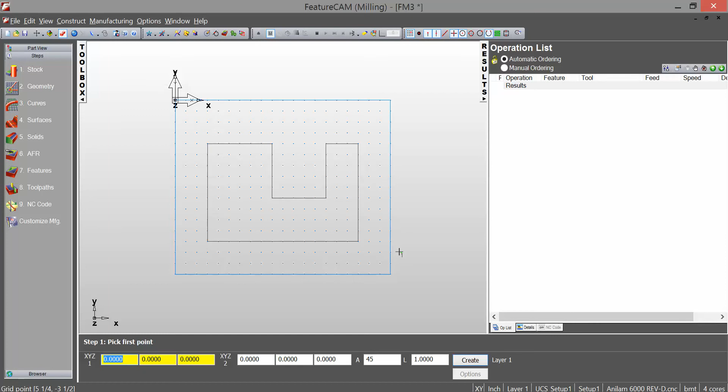So make sure all your geometry is placed properly using that Cartesian coordinate system. Before you can start creating features, you have to put down your geometry. Let's say we're creating a pocket, and I want to create this shape as a pocket. Right now there are 8 different pieces of geometry out there. They are individual pieces, they act on their own. FeatureCAM cannot recognize that as a boundary. You're going to have to create what's called a curve so that FeatureCAM can see that as one continuous piece of geometry as a boundary for your tool.

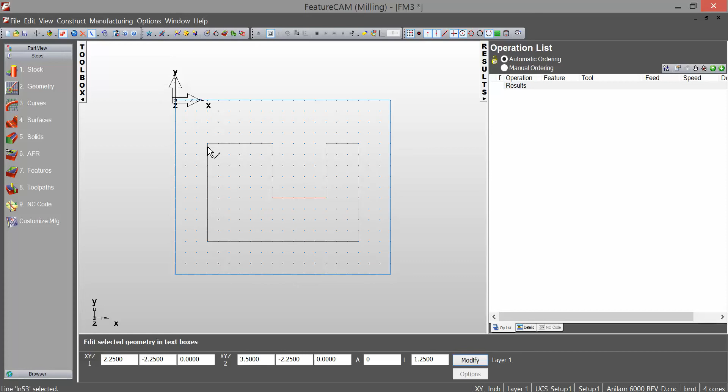So once you've drawn whatever shape you want, let's use the tools and draw this at a specific size. Let's draw that same U shape, 1 inch away from each edge, with a 1 by 1 cut in on it. To draw that, I'm going to use my horizontal and vertical lines. My horizontal line, I'll put 1 inch away from the top, which would be -1, and 1 inch away from the bottom. This is 4 inches tall, so that's going to be -3.

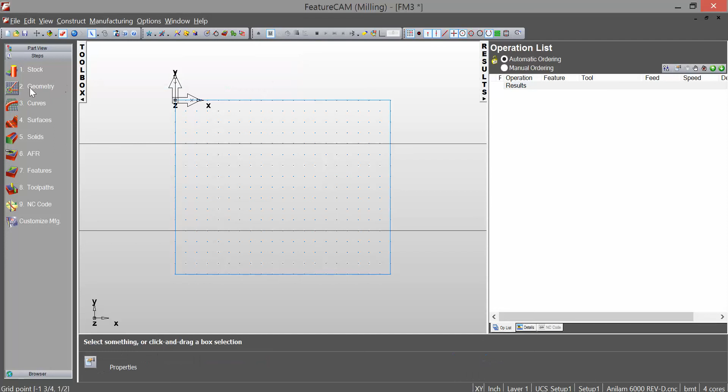I'm going to use an offset of 1, offsetting this top line down 1 inch, and that's going to be the line for the bottom of that little inset. Then I'll use line vertical. This is an X measurement, so my first one is X1. And then this is 5 inches wide, so my next one is going to be X4.

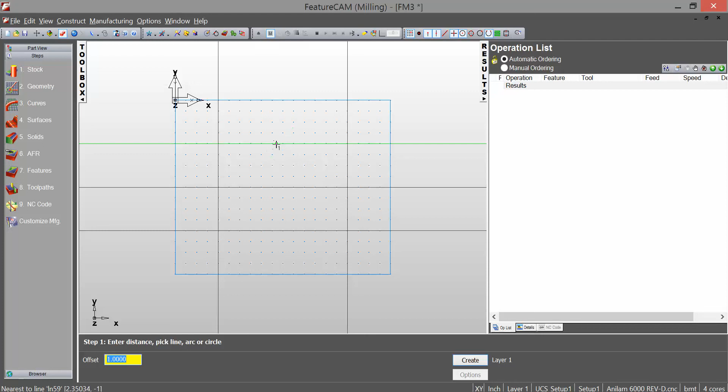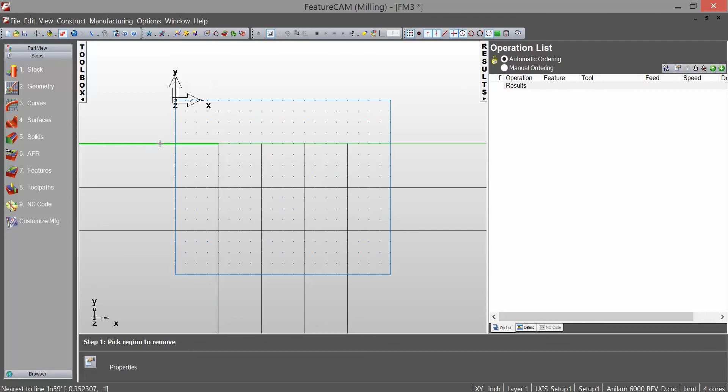Go back into geometry, use my offset of 1 inch. I need to make sure I have 3 inches in between these lines, and I want to make a 1 inch inset, so that makes it pretty easy. I just need to offset each of these lines to the inside to create that boundary. Now, right now it may look like there's just a bunch of squares on your screen. You just need to go back in geometry, edit clip, and go through and remove the pieces of geometry that you no longer need.

There are multiple ways to come up with the same result in this. Find whichever one is easier for you and use that. You may like using those connected lines - the only thing is you want to make sure the points you pick are the right points. If you're using snapping modes and your grid is set up correctly, you're good to go. I tend to favor the horizontal and vertical lines because there are fewer coordinates to put in, and I can use offset pretty easily, then just come in and clean it up with clip.

So there is my U that is going to become my pocket. Again, there are many individual pieces of geometry in here - we have to stitch them all together to create one boundary. That's what's called a curve. Underneath geometry on our left side, you'll see curves. Clicking that gives you the curve creation dialog box. This first option chains a piece of geometry into a closed boundary, the second chains it into an open boundary, and then you have curve wizard and curves from surfaces.

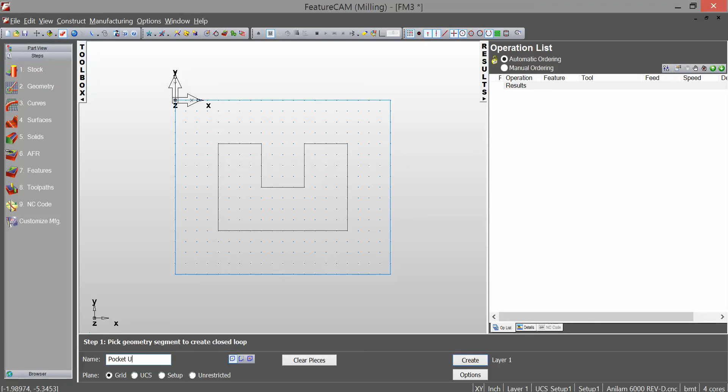Because this is a closed boundary, we are going to choose closed curve. Down here at the bottom, you can name your curve - I'm just going to name this pocket U to let me know what it is. I'm going to click a point on that geometry, and it will follow all that geometry until it gets back to the original point and creates a curve. You can hit create, and then you have that curve created. Now, let me back up and get rid of that curve.

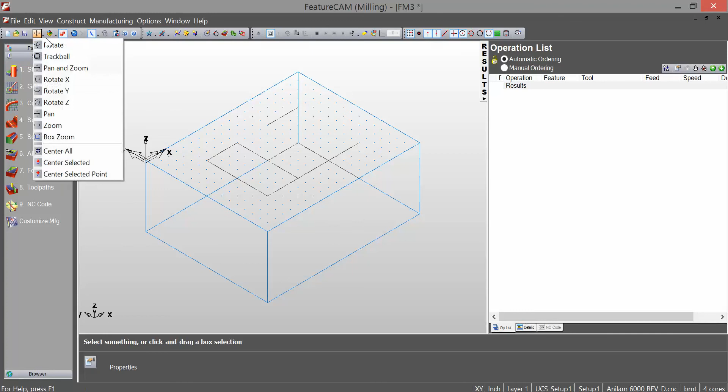Remember what I was saying about Z0. If you had a line here and the Z was not 0, if Z is negative 0.5, I hit modify... let's say I hit that, it's a -1. On screen it looks okay, but if I were to change my view, you can see that line, or those multiple lines, are not on the same plane. But when I'm looking at my top view, it looks fine.

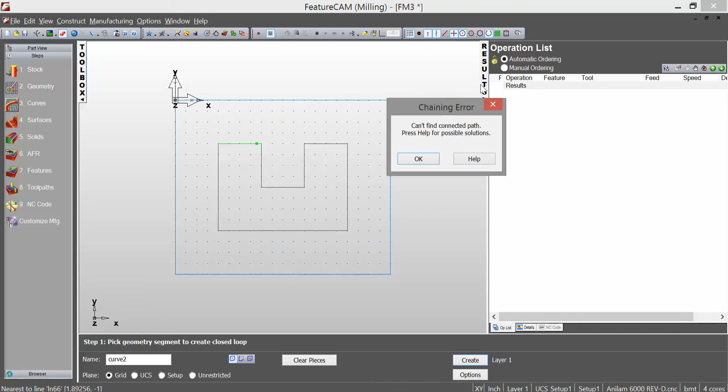And if I go to my curves and try to curve that, I'm going to get an error. So if you see this error and you're looking at the screen, you wonder why doesn't that look right? Everything's connected, but it's not curving. Check your Z's. I have some wrong Z measurements here.

The reason why you can see both of those updated is because this second one is an offset. So when I change this one back to 0, it'll change the other one as well, because this line is based off of this line. That's because I used offset.

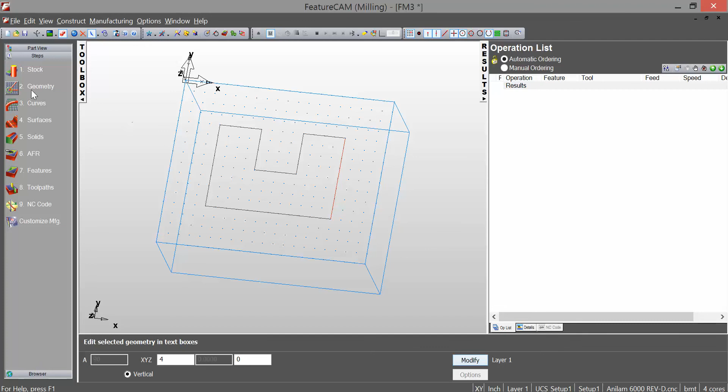So I can go back into curves and create that curve. Name it, create, and there I have a boundary to use for either my pocket or boss or whatever I'm doing. That's a closed curve.

If you're doing a side, or a turning operation, you may have multiple lines, but they are not a closed piece of geometry. But you still need to curve it because they're still individual pieces of geometry.

To curve this one, you want to choose the chain pieces of geometry into an open boundary. You click that first piece of geometry, then click the last piece of geometry in that curve, and it's going to follow all the lines until it gets to that second point, and put all that into the curve.

You can also, if you ever need to edit these curves, come into your part view. You can see all the curves that you've created so far. Here's the pocket, here's that side. You can edit these curves.

I can clear all the pieces and try it again. Down here is close curve. Create a new curve. Or if I want to take away or add to this other curve, I can hit edit.

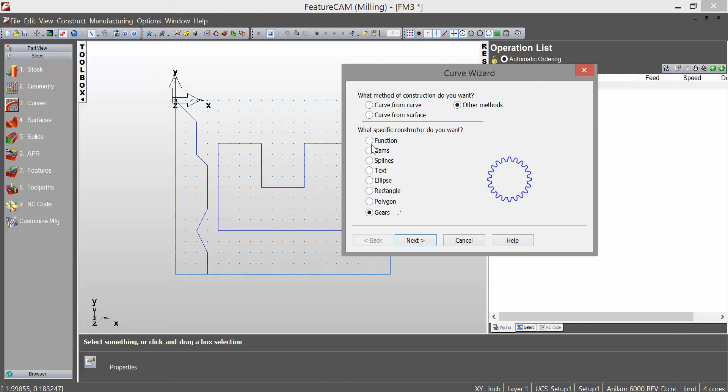The nicest one, the coolest one here is the text. You can go through and create text based on different types of fonts. And it'll put text as a curve on your piece. So if you wanted to do some engraving, or create a water jet profile to cut out a name or something, you can create text based on those curves.

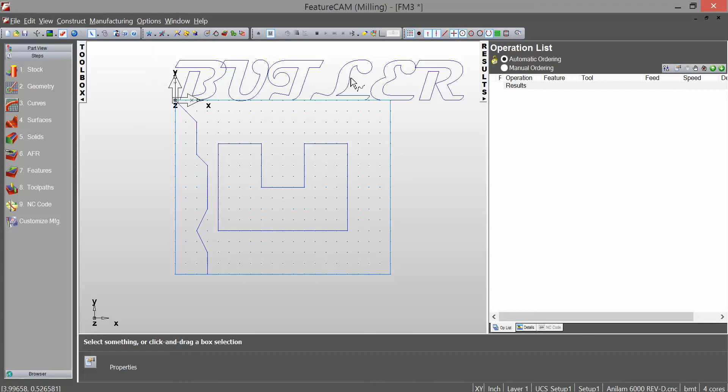So again, just to reiterate, you will draw your geometry using the geometry tools. Make sure they're all on the same plane. Once you have your geometry drawn, if it's a closed curve, pick curves, pick this first one, chain pieces of geometry into a closed boundary. Click that, click a point on that closed geometry. It'll create a curve based on that.

If it throws you an error, check your Z on some of your geometry. You may have a Z measurement off.

If you're creating a side or doing some turning operations, you draw your profile, and then you would do a chain pieces of geometry into an open boundary, picking the first line or piece of geometry on that curve, and then picking the last on that curve, and everything in between those two points it'll include on the curve.

You can name your curves so you can find them easier in your part view. There's all the different curves I made. This must be that other U that I made, so I'll just delete that real quick.

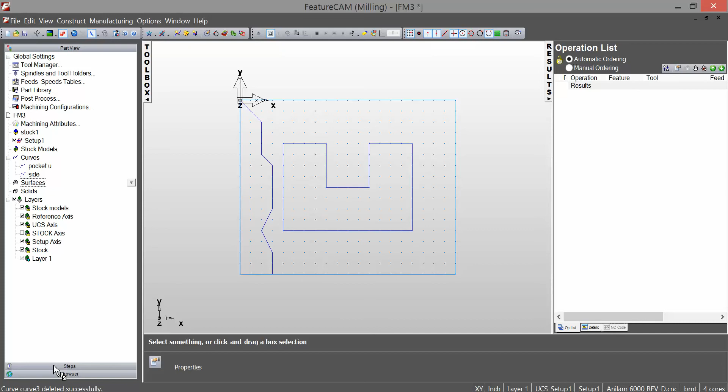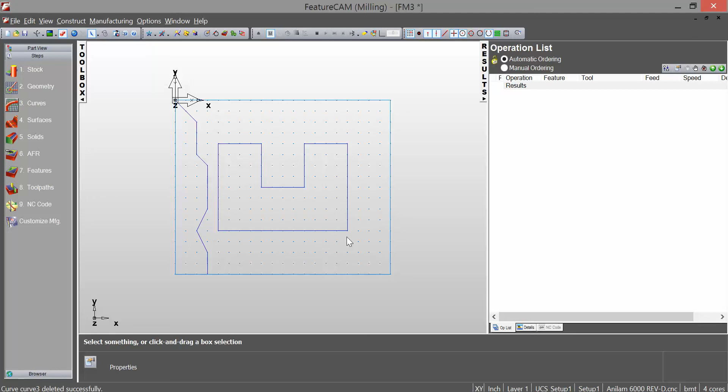So you can create all these different curves based on either geometry or the curve wizard. And FeatureCAM needs curves to be able to generate tool paths and tool boundaries for your features. So make sure that after you've drawn whatever feature you're working on, curve it, then use that curve as the basis for your feature. All right, thank you.